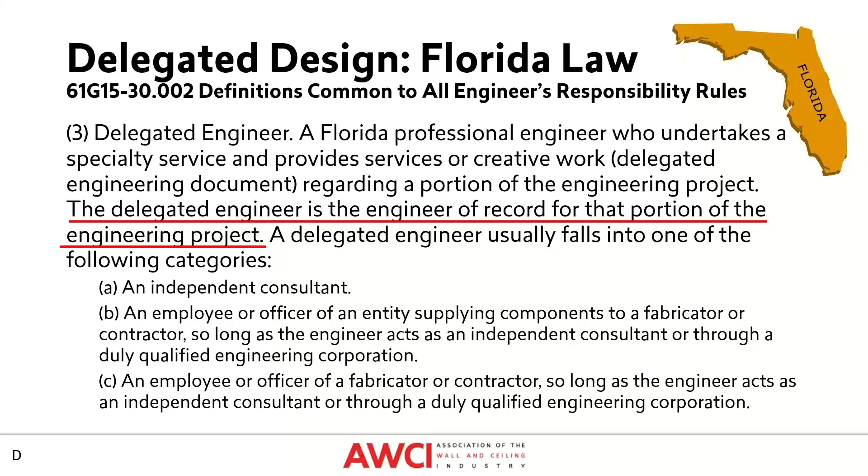They usually fall into one of these categories: independent consultant, sometimes working for a manufacturer or supplier for many years - that's how I cut my teeth, I learned about this working for a supplier of the product - or a fabricator or contractor. Some contractors have their own engineers on staff. I know Andy's company had an engineer working for them who left and went to work for one of the AWCI member contracting firms. So there's a lot of different ways you can have a delegated designer.

There's another group called CASE, the Council of American Structural Engineers. All this is in the CASE documents, but what it means is the architect or the structural engineer of record can delegate the design. So it isn't always the general contractor or subcontractor, but the structural engineer of record still has ultimate responsibility for the overall design of the building. So they can't say, well, I delegated that off, so it's not my responsibility.

You still have to submit the drawings to them. They still review the drawings. They may not know what they're looking for, but if, say, the load is coming into the bottom of the beam and they don't account for the beam twist, that's on them, the structural engineer of record.

And the most important part to us - lines of communication must remain open between all members of the design and construction team. So as a specialty engineer, you must be able to reach out. You may have to go through the general contractor, or at least copy them on your correspondence, but you need to be able to contact the structural engineer of record, or SER.

And when that line of communication is not open, it creates all sorts of problems. I was actually involved with Andy on a project a few months ago where this happened - the structural engineer of record was hard to get a hold of, was not communicative. I think he was a little embarrassed because he'd made some mistakes, but it was very difficult getting that job built, though it eventually led to a successful project.

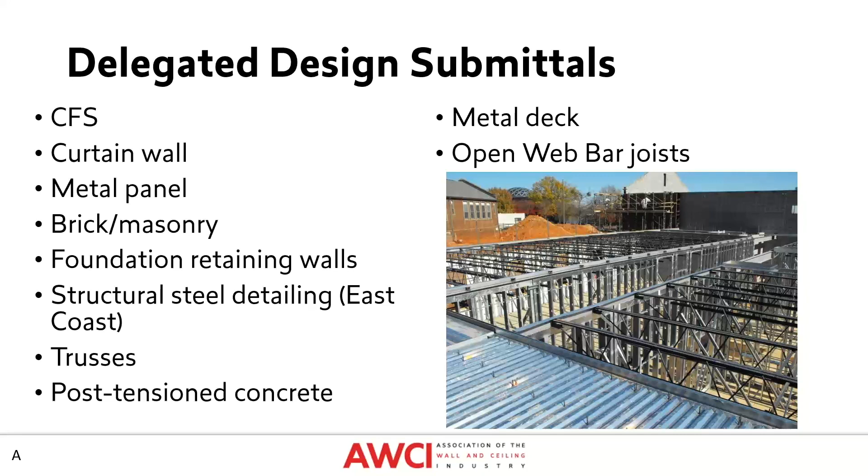Some other items, aluminum occasionally, the window washing equipment, those can impart some heavy loads onto our framing. So if we're going to support the window washing equipment, we need to know it. That information needs to be provided to your engineer so that they can appropriately design it. The same thing goes with canopies. If the canopies are attached to the wall framing, that's information that you're going to need to get from the general contractor and provide to your specialty engineer.

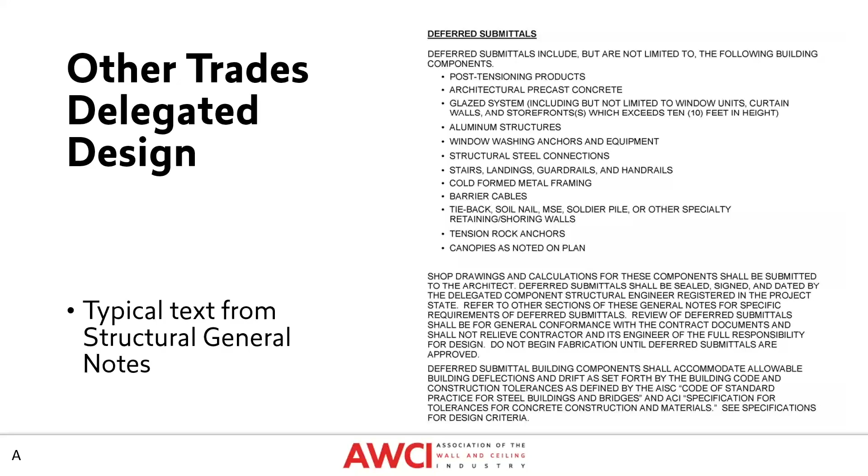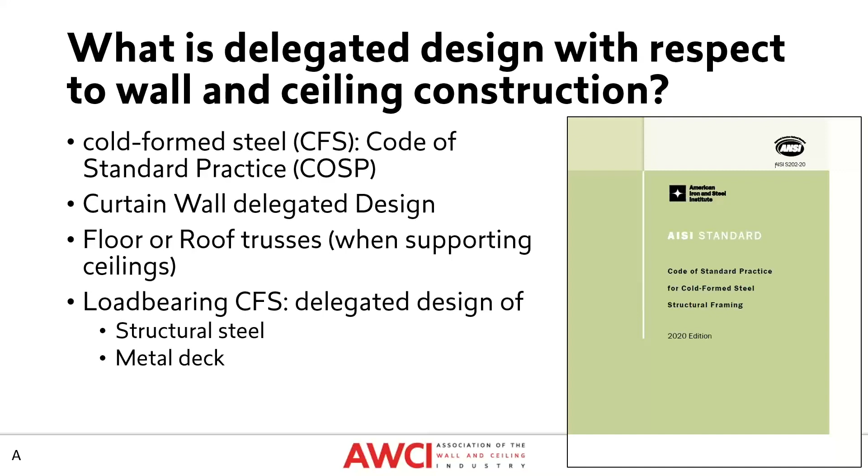Some other things that are delegated: curtain wall design. That's something that's often delegated and we interact with on every single project. Floor and roof trusses, they typically have a similar code of standard practice that we deal with. But if you're dealing with ceilings, you might be attaching to the underside of them, so it's good to be familiar with their work. Structural steel and metal deck, if you're supporting them, and load-bearing framing, then it's important to realize those delegated submittals as well.

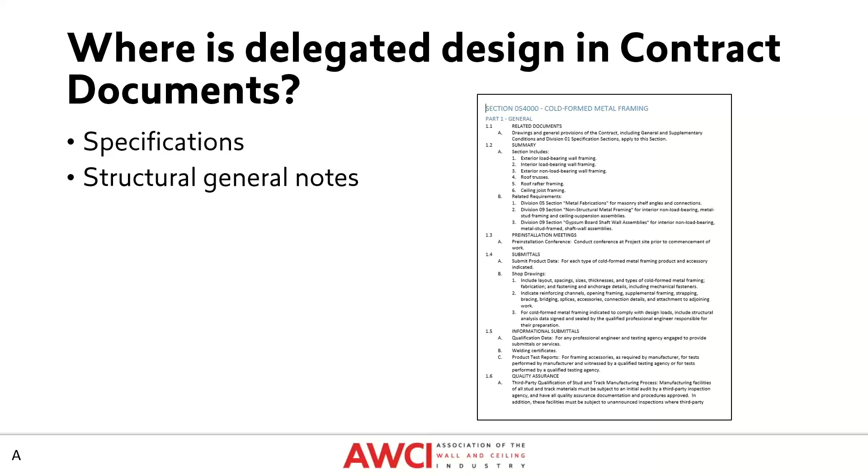So where are you going to find what's delegated? I mentioned the structural general notes. Another good place to look is the specifications, so that might be the 5400 section or the 09-2216 section for interior. Specifically in the 5400 spec, you might see something like this that lays out what's specifically required in the submittals. And then you get to section E, where it specifically indicates that shop drawings are required.

So what is required of the shop drawings, this is something that you're going to provide to your specialty engineer so that they have this information as well. So they know what's required of their design and their submittals that you're then going to submit to the general contractor and the architect and engineer of record.

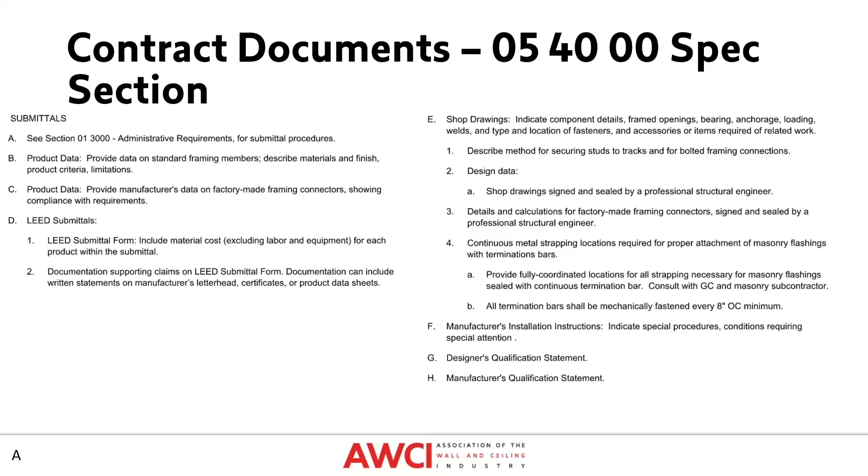I should note that in the handout, the headings on this slide and the next one are backwards, so just make a note of that. There is a big difference when you go from the 5400 to the 09-2216, because you don't see that requirement for shop drawings necessarily. You might have to submit product data. This does include shop drawings, but it's not to the extent that the 5400 structural requires. So it's just something to be aware of. You want to read these specifications to know what actually is required of you and your engineer.

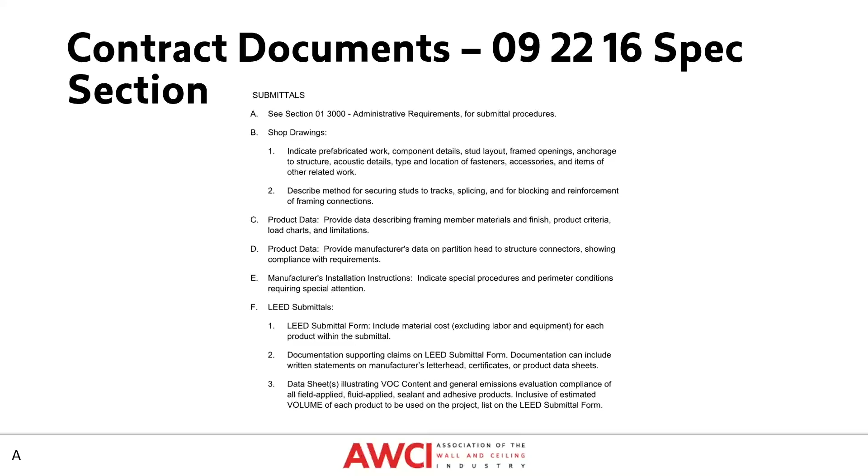So now this brings us to our first poll question. Hopefully you're all seeing the poll question and able to vote. So where in the contract documents might you find the requirements for a delegated design? The 5400 specification, the 09-2216 specification, the structural general notes, or any of the above.

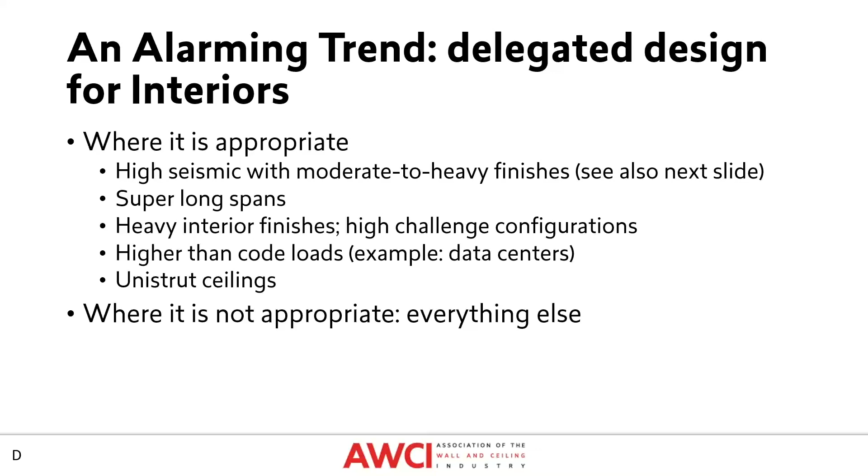But most of this stuff, most of you contractors that do this type of work have been doing it for years, for decades, and you know how to make it work in most applications. When you get a structural engineer involved, all that does is increase cost. You're getting into an area outside their specialty, into requirements that, quite frankly, are not necessary for adequate performance of the building. So I say it's appropriate in these 5 bulleted areas, and not appropriate with everything else.

Interior walls, the interior framing, is considered non-structural framing. Exterior walls, curtain walls, and load-bearing walls that carry the weight of the structure are considered load-bearing or structural framing. AISI has 2 documents: AISI S240, for structural framing, like load-bearing studs or wind-bearing studs on the outside, and AISI S220, for interior non-structural framing.

For interior non-structural framing, there are limits on how much load these non-structural members can carry. It's limited to not more than 10 pounds per square foot, with the caveat that if you're in a pressurized plenum, it can go up to 15, and you can still use non-structural studs. It's also limited to no more than 100 pounds per foot of wall, or no more than 200 pounds per individual stud.

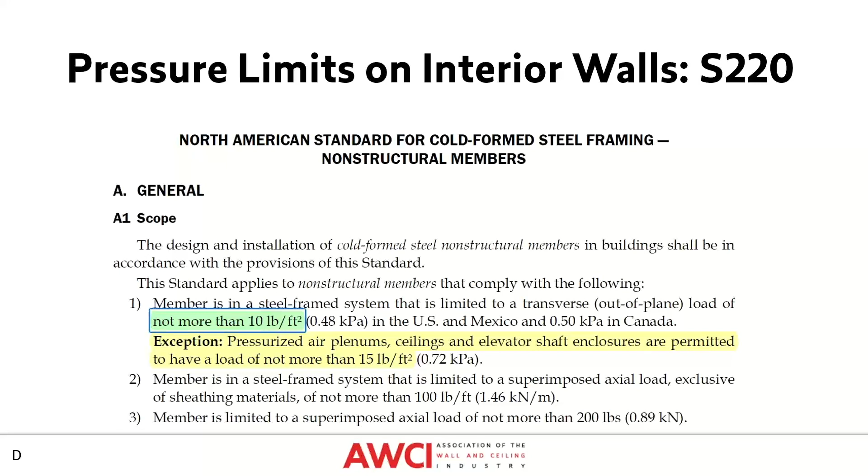So if you want to hang cabinets on the wall with studs behind it, and that cabinet won't impose more than 200 pounds per stud, you can do that with non-structural studs, sometimes without having to hire a specialty structural engineer, depending on the manufacturer's data available. The limit for pressures in the building code is a live load, not a wind load—interior walls need to be designed for 5 pounds per square foot, unless there's something additional specified. Sometimes for high-speed elevators it'll be up to 10 or 15 pounds per square foot.

So this leads us to the next poll question: what conditions are appropriate for delegated design on interior non-structural walls? Option 1, it's never appropriate. Option 2, heavy finishes, long spans, higher than code loads. Option 3, delegated design should always be specified for interior walls. Or lastly, when the walls are supporting cabinets.

We'll leave the poll open for a minute or so, and it looks like we have a question out there: is the role of delegated engineer legally defined in all states, or does it just vary?

I'll answer from what I know, which is that it is defined in some states and not in others. So what you should do is ask the engineer who is registered in that state, and they can tell you whether or not it's defined.

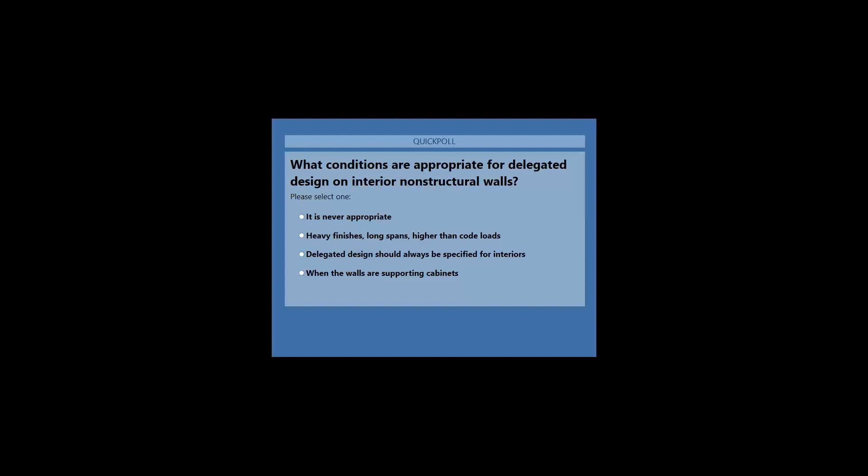Andy, do you have additional information on that? The correct response—you can go back to the Code of Standard Practice, which technically isn't enforceable, but it's defined in there. And that is true, applicable as well.

All right, so I cannot see the poll results. Andrew, if you could read them back to us. We got 86% said heavy finishes, long spans, higher than code loads. So I think 86% are paying attention—good job, or guessed right. All right, great.

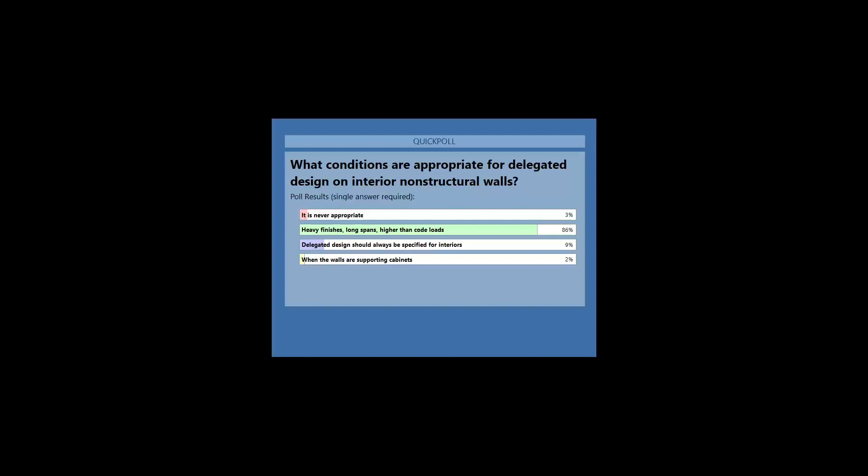Thank you. Just a couple comments back to Andy's slides before.

The horizontal shaft and vertical shaft may require engineering. The horizontal shaft anchorage is often missed during construction. That's referred to in, say, 0922, 1623. And then, so is there a design requirement for shaft walls?

I think that was just a comment to keep an eye out for that. And then another one: do you know the official definition and difference between delegated design versus deferred submittal?

Andy, I'll let you take that one. I don't think I know the specific differences offhand. Don, do you? So a delegated designer is, I think, the way it was defined in Florida.

So the state defers it—the designer is the individual that provides that design. And then it talks about the design responsibilities. A deferred submittal may have definitions in different structural documents, and that's something that comes after the fact. A deferred submittal does not necessarily have to be done by an engineer.

So you can have deferred submittals for items that include a manufacturer's rep providing connection details, or a company that makes brick ties or fasteners providing a design for those fasteners based on a certain amount of wind load. That can be a deferred submittal, but you may not have to have a delegated engineer design those. So the deferred submittal is a broader category, and it may be a sub-submittal that could be an architectural design that may not have been the responsibility or purview of the structural engineer of record.

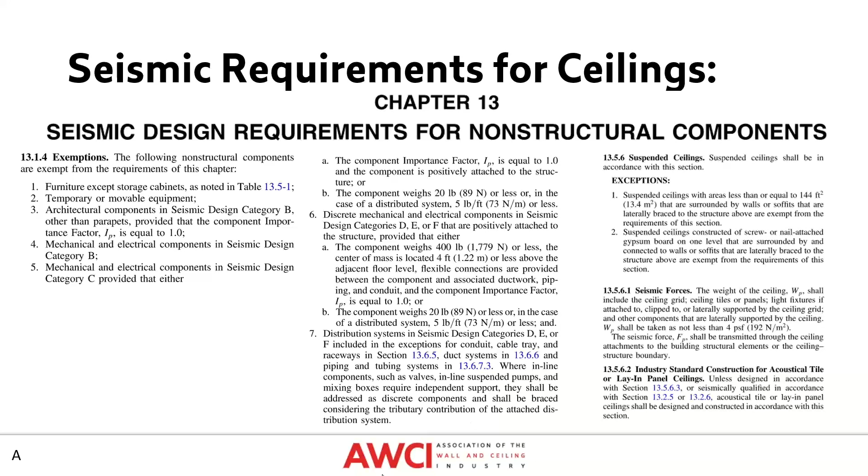So the one thing you want to pay attention to here is specifically the exemptions or exceptions, which ASCE 7 has decided to use both words for. In section 13.1.4, they provide a couple of exemptions, specifically furniture, except for storage cabinets. So as Don had mentioned, when you have those heavier storage cabinets hanging on your walls, that's going to need to be designed for seismic.

If you have architectural components in seismic design category B—also known as SDC on the structural general notes—and your component has an importance factor equal to 1.0, then once you exceed that, you're going to have a seismic analysis done on your non-structural components.

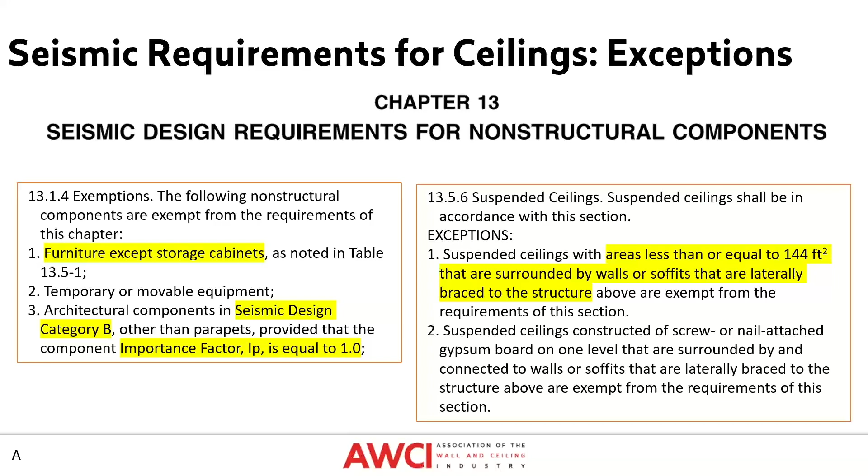For ceilings, if the area is less than or equal to 144 square feet and surrounded by walls or soffits that are laterally braced to the structure—so if it's all tied together and can't move, and it's smaller than 144 square feet—then you don't need to have a seismic analysis done. Otherwise, you do.

And that quickly brings us to poll question number 3: which parameters will allow seismic design to be excluded for non-structural framing per ASCE 7? Furniture, not including your storage cabinets; or architectural components in seismic design category B, SDC B, with an importance factor of 1.

A 144 square foot or less ACT ceiling with braced walls on all sides, or all of the above.

Someone just commented that deferred design is trending because the specialty structural engineer has no contractual relationship with the SER. I think Don's actually going to mention that relationship. Don previously noted that our relationships are typically with the contractor, the subcontractor, or the general contractor, and not directly with the SER.

89% got it right, so yes, it is all of the above. Those can all be excluded for non-structural framing.

There's another question here that says, I've always thought engineering fees should not have to fall on the metal framer, and the metal framer needs to know answers before confirmation. I've been involved a lot of times, talking with people about where that delegated design belongs, and shouldn't the engineer of record be doing his or her job to complete the design.

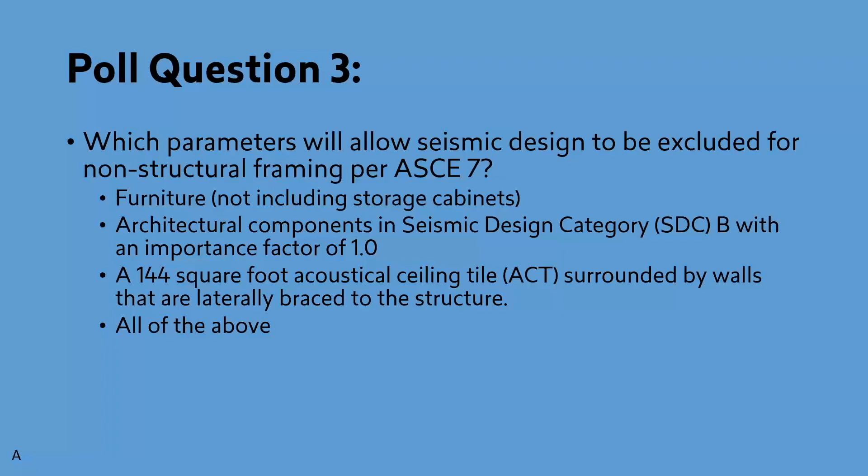Seismic for acoustical ceilings. Now this is not a spring hung gypsum board, but this is another document that covers a lot of the same provisions as ASCE 7: NEHRP recommended seismic provisions for new buildings and other structures, FEMA P2082, Volume 1. A lot of the provisions in this were pulled into and adopted into ASCE 7.

The reason I point this out is this is not a code required document. It's not even referenced by the building code, but a lot of the provisions here are the same as in ASCE 7, and this is a free download. ASCE 7 you have to get from the American Society of Civil Engineers. I don't think it's like the International Building Code where you can view it online. ASCE, because they're an association, has to make money selling their books, so I don't think you can get it free. Correct me if I'm wrong, put something in the notes or chat, but it's over $100, I think, even for ASCE members.

So if you want to get this document, here's the place where you get the free download. What it has in it is a table in section C13.5, summary of requirements for acoustical tile or lay-in panel ceilings, back in the commentary. By the way, for those of you that do have ASCE 7, there's a similar table in the commentary of that document, but it talks about all the different requirements based on size.

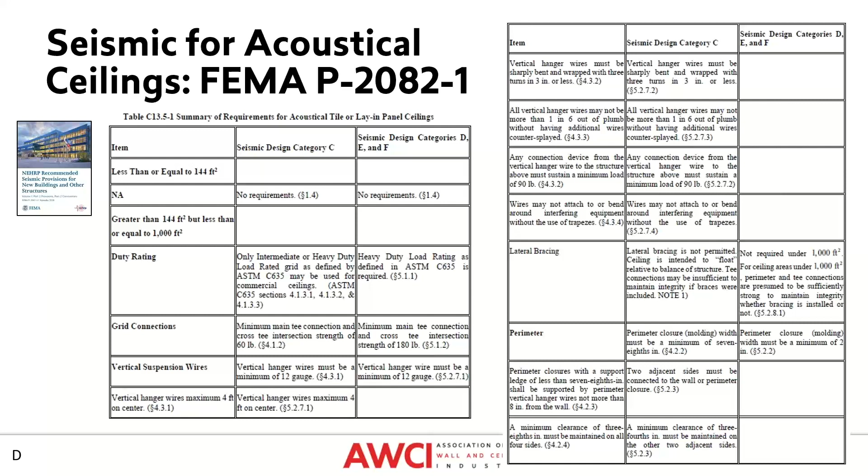We had a couple folks from United States Gypsum come in back in February and give a presentation on seismic requirements in suspended ceiling design. They do a very thorough job of going through the background of the requirements, what the seismic requirements are. They mention things like ASCE 7 as well as the ASTM standard

I mentioned just a moment ago, ASTM standard E580. This contains a lot of the same requirements that are in ASCE 7, and these are often referenced in the architectural specifications. And of course, they are referenced in the building code. This gives a lot of the details for offset from the edge of the walls, how you could put the support wires in, the vertical supports and splay wire supports. So different requirements for different types of ceiling, but ASTM standard E580 gives those requirements.

Again, this is not a free download. I think it's $63 for the latest version of the document, but if it's referenced in your standards and you're doing these kind of ceilings, it would be good to go ahead and get this document.

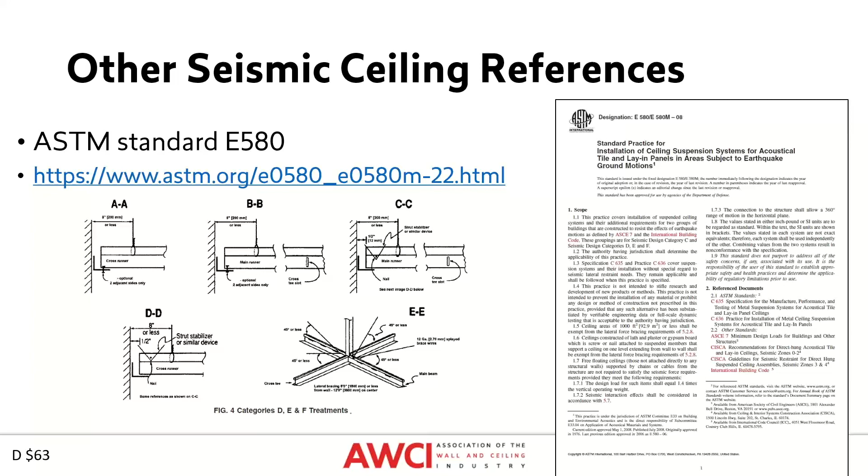So that brings up the question, who is responsible for the design? Andy, back to you.

As mentioned, the code of standard practice is really going to lay out who is responsible for what. So when it all boils down to it, technically the engineer of record is responsible for the overall building. They're responsible for even what they delegate. So when they do delegate, they're also responsible for providing a lot of necessary information.

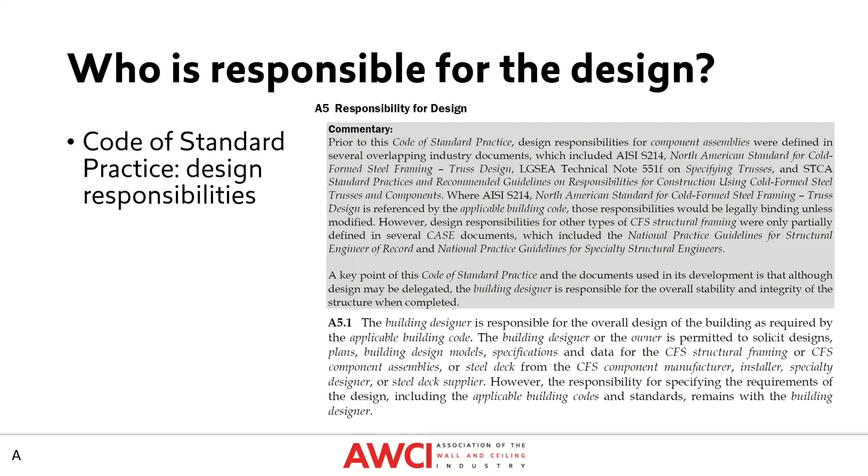So that's the appropriate building code, the appropriate loads that the delegated designers have to conform to. Whether that's gravity loads, lateral wind loads, if you're doing a load-bearing project, the gravity loads that it's supporting, as well as any kind of lateral loads on a lateral system, shear walls, X-brace walls, that all needs to be provided by the engineer of record. Oftentimes they shirk that duty, but according to the code of standard practice, that's information they are required to provide, as well as a complete set of contract documents.

So who's responsible for the design? The owner or contractor shall furnish to the CFS component manufacturer and installer a set of construction documents prepared by the engineer of record and architect of record, including any addenda showing basically what's required of you. And your responsibility is limited to what's on the construction documents.

And as all of you know, per that first sentence, the construction documents are assumed to be correct in all details. And that happens every single time you get a completely perfect set of drawings and nothing's incorrect. Obviously, that's not the case, but you are limited to what's given to you and only responsible for that. So if things change, they need to provide you with those changes so that you can address them, provide change orders as required, and to any changes they make due to things that have changed in the drawings.

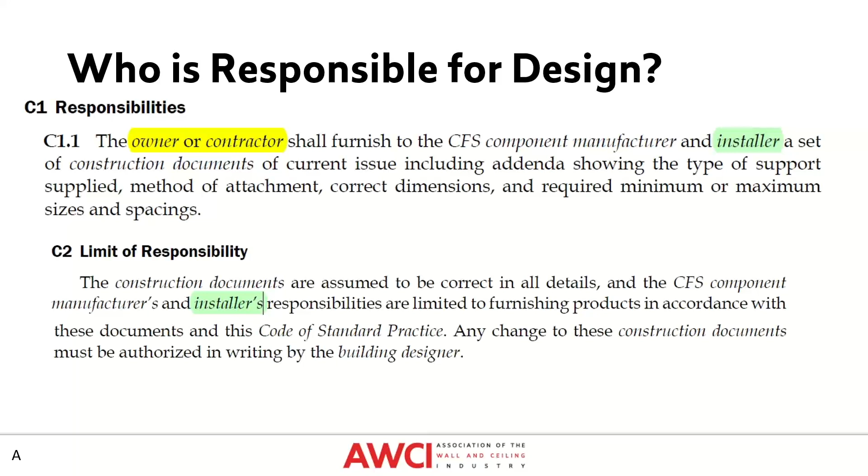So what kind of things do you want to look for? What information do you need? You do need a full set of drawings, so that's architectural and structural drawings. When I'm doing my design, I absolutely need those things, and they need to be the most up-to-date sets.

If you send me a bid set and you're getting ready to build it in two weeks, there's going to be a newer set of drawings out there. We may need a set of mechanical drawings, especially with interior framing, to have an idea where mechanical ductwork and piping is. The structural general notes should have the code reference, and it should match the data the drawings provided.

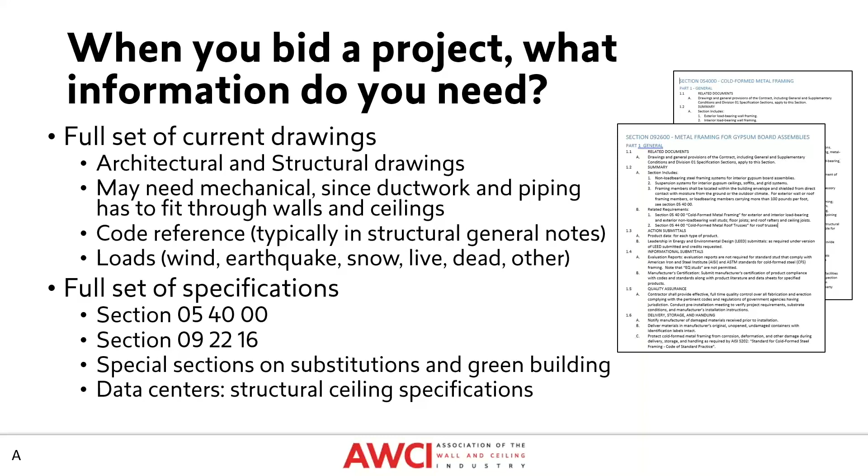Again, they need to provide loads: wind, earthquake, snow, live, dead. There might be some others, like rain or some other things as well. A full set of specifications, so that's the structural and non-structural specifications, as well as maybe some additional specifications if there's substitutions, some green building specifications as well. And for data centers, sometimes they might have a structural ceiling specification, so if you're doing that type of work, that's something you also want to get and provide to your specialty engineer.

Before we continue on, someone asked, in this delegated design or deferred submittal, how is a sub expected to price work without knowing the sizing, gauges, and connections of the project or correct framing components? What do they do?

That's something we're going to cover a little bit later on, but what you do is you make friends with a specialty engineer. You hire them for projects, you don't just use them, but a lot of times if you've been a repeat customer with these guys, or sometimes even if you pay them up front, they can give you preliminary sizing before you get the job. And what you have to do is, if you do get the job, you've got to promise to work with those guys. Andy, I'll let you comment on that as well, because you've got customers that treat you right and some that don't.

Yeah, that's absolutely true. You have your customers that you work with hand in hand that say, hey, can you look at this job before me? I'm bidding it, it's got some crazy tall spans, I don't know what to do. I think some subs have a good idea and have some software that they use that helps them price stuff, but having that relationship with a specialty engineer that can give you some preliminary sizes that you can take to bid can give you an advantage. And it builds a good relationship with an engineer.

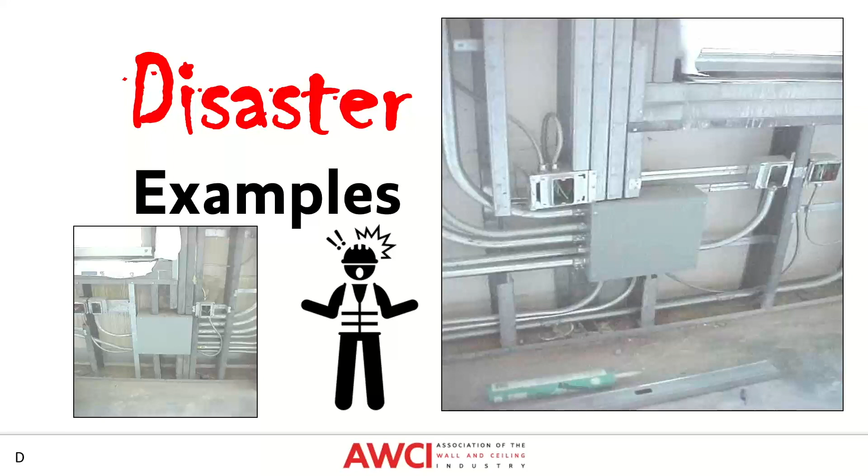So disaster number one, we're going to cover 4 of them. You won, or even worse, you built the job and you find out afterwards that you totally missed the delegated design requirements hidden in the contract documents. So what do you do if you miss the requirements?

Number one, you plead with the general contractor or the architect or the engineer or whoever put that requirement in there and explain your situation. Tell them, hey, look, I've been doing this for years, we've done similar projects, we use heavier, beefier framing, we use better studs, whatever it is, but try to get that coordinated and see if they'll let you off the hook for this thing.

Now, a lot of times they don't get right back to you, they don't tell you immediately yes or no, they leave you hanging. So while that is happening, don't wait for an answer. Get with a specialty structural engineer. Hopefully you got one out there on speed dial someplace, or you've got a good relationship with one. If you don't know a specialty structural engineer, check with the Cold-Formed Steel Engineers Institute, cfsei.org.

They've got a tab in there called Engineer Finder, and you can find somebody, call them up, find out what their price is and their time frame. And what they're going to need from you is three things: architectural drawings, structural drawings, and the section of the specification that is requiring this.

And what they will do is they will help you read through that specification section or read through the documents and see really what does it require, because it doesn't always require a full set of drawings and calculations. Now, I know when Andy does these jobs, when I used to do this kind of work, we would provide a full set of drawings, full set of calculations, put our seals on them, and that would be the entire package.

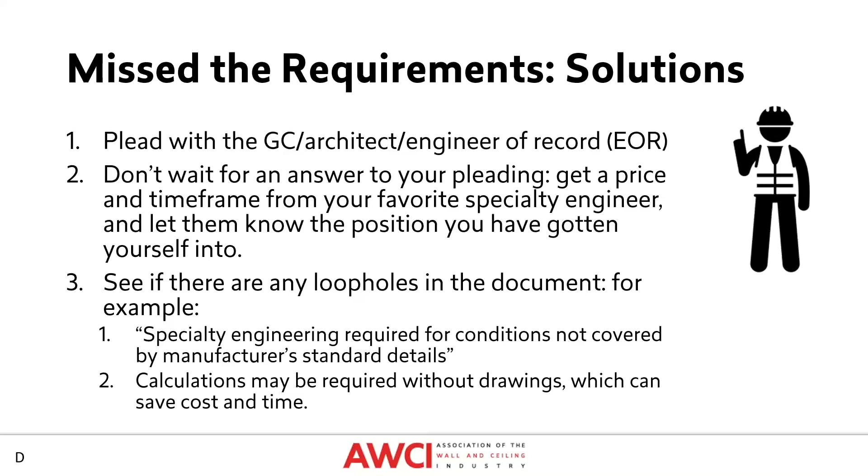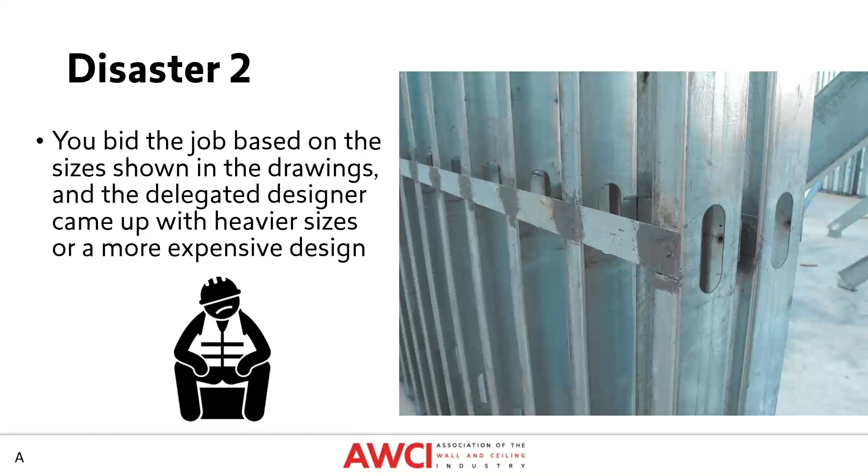So, disaster number 2, Andy, I'll turn it over to you. All right, so you bid the job based on sizes shown on the drawings, and I, or your delegated designer, came up with heavier sizes or a more expensive design.

Go through all the bullet points, it all leads to the last one. Basically, a lot of times the engineer of record provided a design that's not feasible, whether that's difficult connections or just connections that aren't feasible. They didn't necessarily consider deflection. We've seen engineer of records put shear walls at slip connections, which makes crazy, ridiculous detailing required to make that work.

A lot of times the engineer of record didn't read the footnotes, so this might come into play with them looking at a table out of the SFIA tabulated data, like the footnotes to the right there. So basically it would assume that your wall is fully braced, which would be less 4 foot on center or tighter. Their design might require web stiffeners, which is not something that's standard. You're not going to necessarily install web stiffeners at the top and bottom of your studs, because that's a lot of labor and a lot of extra material. So that's why we might come up with a heavier stud than what the engineer of record specified.

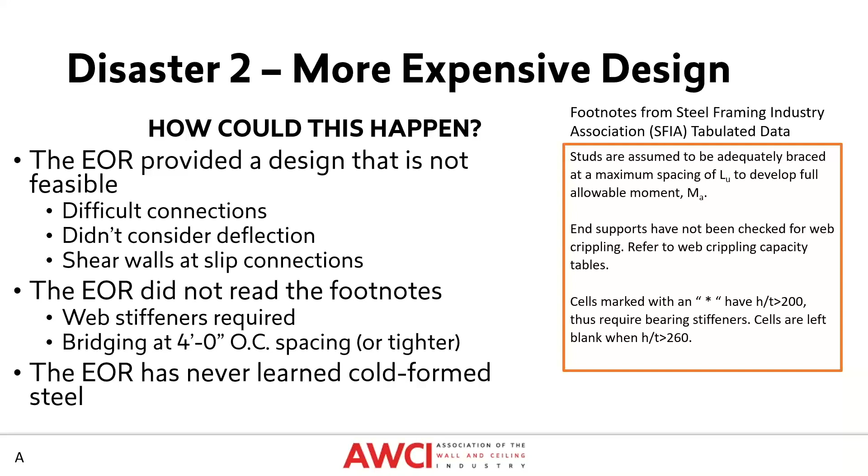So basically, like I said, a lot of times it boils down to the engineers never learned cold form steel. They're opening up a catalog, they have a basic idea what they're doing, but it's basically why you hire a specialty structural engineer, because they, and we, are the experts and can help you through some of the things the engineer of record might not know.

So disaster number 3 is the other side of the coin, where you hired a good specialty engineer to do your delegated design, and we came up with lighter sizes than what are on the drawings. But either the engineer of record is insisting you build it the way it was originally shown, or the GC is asking for a credit for the lighter sizes.

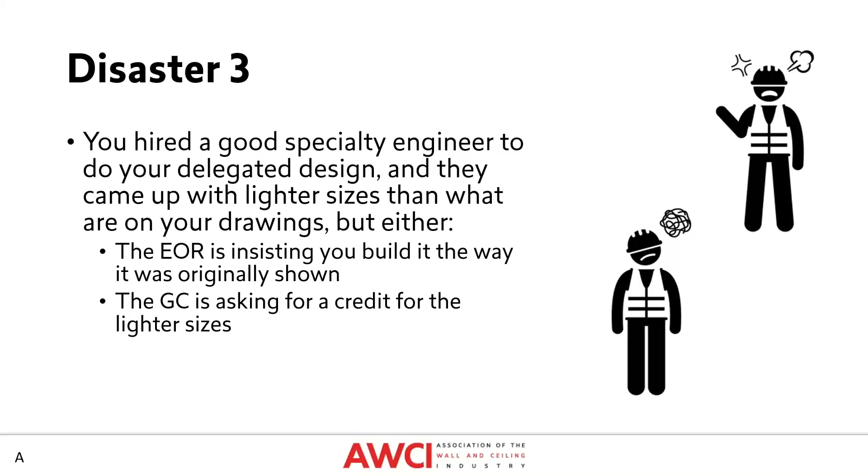So sometimes we'll see the reasons aren't necessarily clear, but we'll come up with something more efficient and less expensive. We recommend working with your engineer to make your case. We're already submitting calculations, so the engineer of record has them to see where we came up with our design and why it's the appropriate design.

This actually ties into one of the questions we just got about anchors. We've seen a requirement for screw anchors or something other than PAFs for connections, and it's not really clear what the reasoning behind that is, when there are more efficient ways to do your top and bottom connections. We've also seen in specifications a requirement for PAFs to have a 10 times safety factor on them. That can actually be detrimental to the structure.

If I'm designing the connections for 2 or 3 times more than what they need to be, you're going to have 2 or 3 times as many PAFs. To get that in a small area, you're going to start busting out concrete, especially in post-tension concrete, to the point that you don't have a viable structure. So hiring a good specialty engineer, we can make this case for you.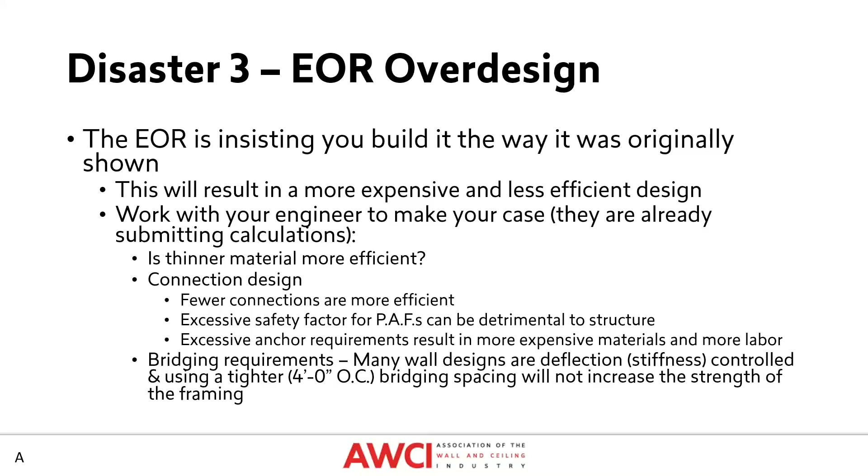Another place is the bridging requirement, where regardless, they say no bridging has to be 4 foot on center, when in a lot of cases, for curtain wall framing, that isn't the governing factor for the design. So you can go to 5 or 6 foot with your bracing. When they're asking for credit for the lighter sizes, you really shouldn't be punished for your engineer's efficiency.

If the sizes were on the drawings, every subcontractor was bidding based on those sizes, so you shouldn't be punished for the fact that what was on the contract drawings wasn't correct. This kind of goes back to that good relationship - if you have a good relationship, your engineer may be willing to assist you in your arguments and help provide proofs for why you should be able to use those lighter sizes.

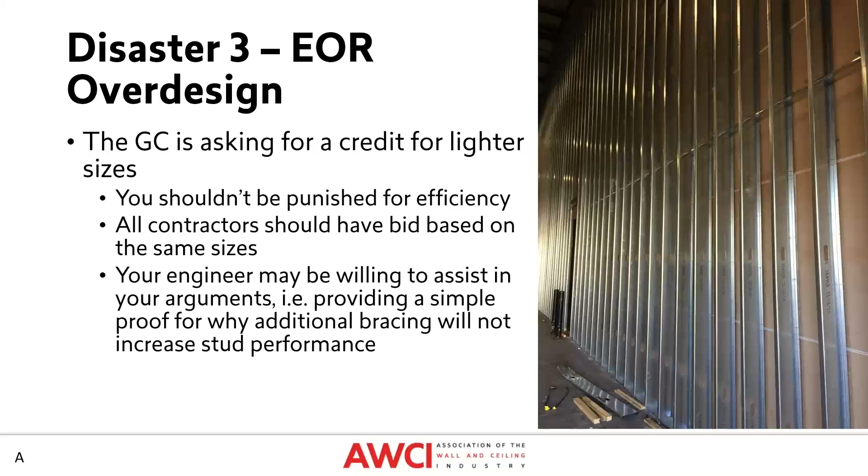All right, that brings us to our last disaster, disaster number 4: coordination with other delegated designs. As many of you know, when the project starts, a lot of times you haven't even been contracted on the job, and the same goes for some of the detailers, curtain wall designers, and sometimes delegated design drawings for the exterior cladding. So as the folks designing or installing the steel that's going to hold up that exterior cladding, you've got to wait for those specialty delegated design drawings to come in. The curtain wall guys have to wait for theirs, the truss guys have to wait for theirs. A lot of times there's coordination that isn't ready yet when it's time for you to do your design. So you're waiting for these drawings, and when they do come in, all of a sudden they don't match.

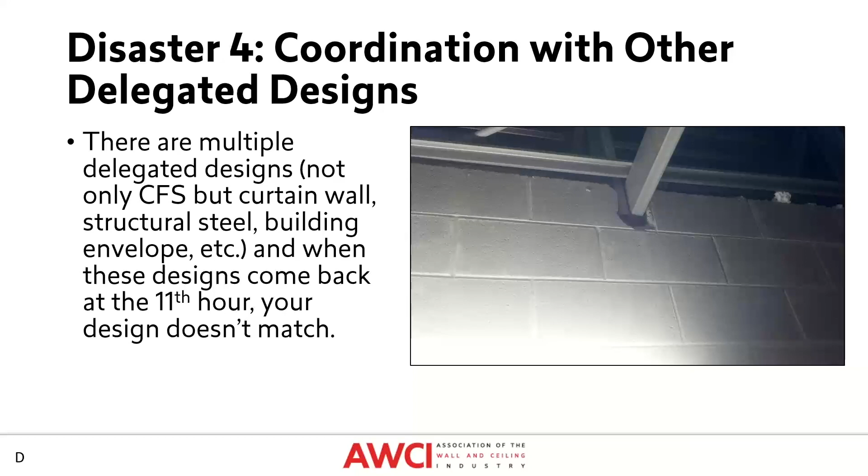Here's one example on the screen: the trusses went in and they're down below the level of this concrete block wall that went up. So when they went to put their pre-manufactured trusses in, they just notched out the block to get that truss in place.

Here's another example. If you're designing a ribbon window and there's a door in it that goes all the way down to the ground, it looks like there's a nice sturdy jamb stud on either side of that door opening, but what if that jamb stud hasn't been designed to carry the little knee wall down below? This doesn't look that bad, the knee wall isn't that tall, but there are super tall windows where sometimes the knee wall comes up 4 or 5 feet, and there's got to be a moment design down there at the base.

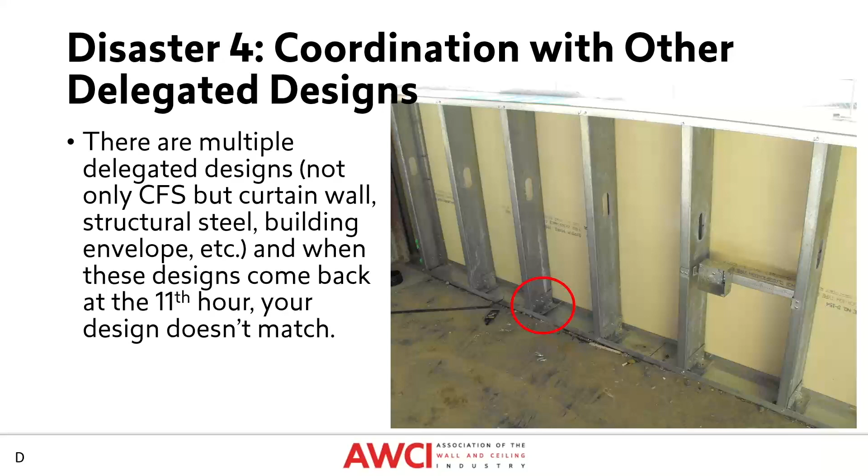And this is what has happened here: there's a ribbon window, a spandrel window, and that moment connection that had to be put at the very bottom. So if you haven't accounted for this in your bid, these are not cheap connectors. The hard part is the labor, drilling those big fat anchors down into the concrete to hold this in, and then putting all those screws into the stud. So if you haven't accounted for it in your design, and you've got a long spandrel window that needs a bunch of these, like this building right here, how do you account for that? Because it can be difficult.

In a curtain wall window situation like this, this is a project I did many years ago in North Carolina. We had these spandrel beams at the perimeter, and we had to bolt it to the side of the slab at the second floor and the side of the roof slab, and then put kickers up in there. But when there's deflection at the roof or at the second floor, where is that deflection going to go? It's got to be taken out at the window head, and a lot of these window manufacturers don't have deflection details for the top of their windows. So this is a deflection detail that Andy's company came up with, but they've got this special caveat note in red, clouded, all capitals: architect and engineer verify, general contractor coordinate, to make sure that this slip connection will work and can be installed properly over the top of the window to allow this movement.

Any slip connections, as many of you know, are becoming more and more important to make sure that the rain screen, the water resistant barrier, and all those barrier systems maintain all the way through, so there's accountability for movement. Whenever there's a detail for movement, that has to be carried all the way through the wall. A lot of times the architects don't carry that through as far as their design and how the exterior works.

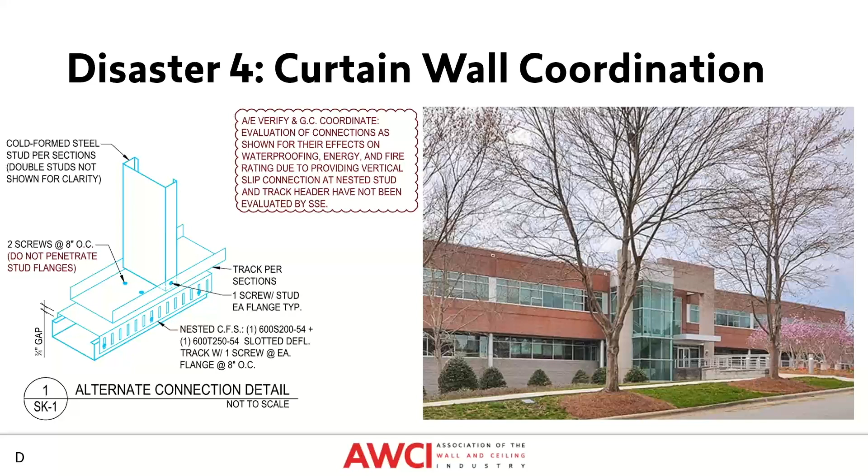So those are the disasters we're going to talk about. Let's also talk about avoiding the pain, and we're going to give you 6 steps. The first one we've already mentioned: partner with your specialty engineer early. Get to know them, work with them, have them on your speed dial. Then they can give you designs up front, and you're not surprised by some of this stuff.

Send them your architectural and structural specifications, let them read through it. As they provide their bid, they may give you information. They may say, hey, even though we usually design brick veneer for L over 600, there's a requirement in your spec that says L over 720, and therefore this stud that they called out isn't going to work, and you're going to have to go heavier.

I know this is an issue because you're trying to bid apples to apples, but if you don't bid it right and you do get the job, then you've got to pay for it one way or another. You've got to do that right design.

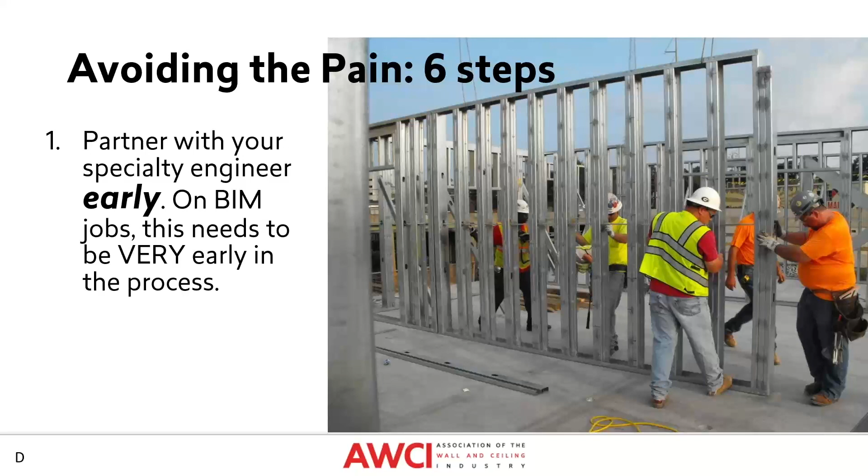So get with the guys early and make them your friend. Become a good customer for your delegated designer. If you have a good one that you like working with, there's a lot of benefits to that, including the potential for free upfront service and help in the bidding process. Your engineer can provide you a proposal up front, potentially give you some sizes for various situations that you might not have a good feel for.

Also reviewing the specifications, the structural drawings, they might have some weird things in either of those items, like bridging at 4 foot on center, or minimum thicknesses like 54 mils. Sometimes we've seen 68 and 97 mils and told our client, hey, you want to qualify this in your bid because 97 mils is ridiculous. You're not going to need that for a 3 foot tall stud.

We've also seen additional design requirements, or the big bad word that most of you don't like to hear: welding. You might start looking at structural details and see that they're requiring you to weld things, and obviously that's not the best way to perform cold form steel framing. So we'll help you find those things. A good relationship often results in better assistance mitigating a lot of disasters. So those relationships are important.

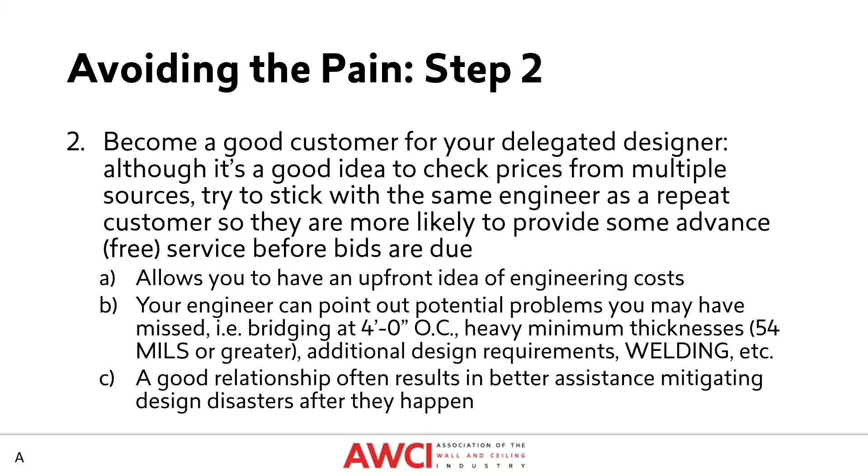That's right. All right, step 3 of 6. Read contract documents carefully, especially the specifications and the general notes, and have your delegated designer read them too. Sometimes the requirements are hidden in an entirely different specification section than the 05 40 00 or 09 22 16.

They may be in the gypsum requirements. They may be in the tile requirements. They may be in the mechanical requirements. I did a project in South Alabama where we designed a roof truss, and I didn't leave an opening for a 5 foot by 5 foot duct. Now the ductwork was shown on the mechanical drawings as a single line, and I missed it.

It was my fault. But what the mechanical guys did, they just took a web right out of that truss. We had to reinforce it. But the question is now, whose fault was that, right? I mean, it was my fault, it was our contractor's responsibility. We were able to work with them and get it worked out.

But this is why you want as many eyes as possible on those documents, on the general notes, on the architectural and structural drawings. Make sure you're working from the right set of documents, as Andy showed you how you can go in and check what building code that is. This is something that the specialty engineers do every day. It's different in different states, different in different jurisdictions.

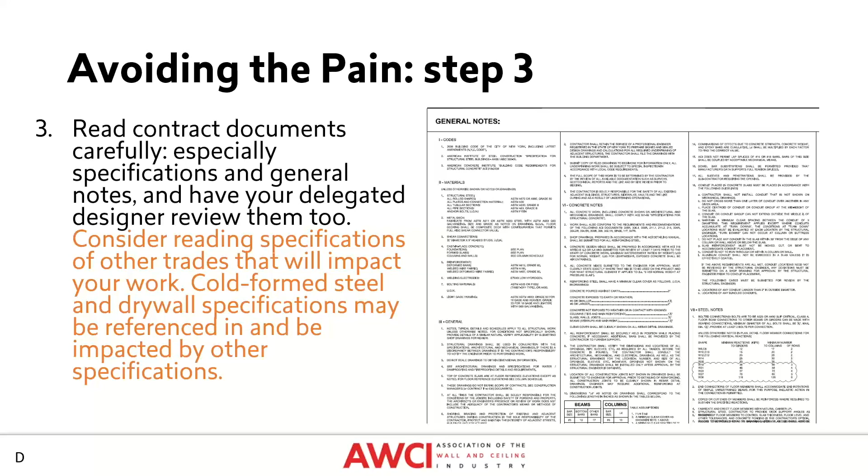We had one question come in asking about what determines whether or not we've got to make submittals to the city. That's up to the city. Most jurisdictions don't need to see the specialty submittals, but there are some jurisdictions, especially out on the West Coast, that want to see all this stuff. So again, it will depend on the city. If you're working with an engineer of record or specialty engineer who has worked in that jurisdiction before, they'll be able to give you a better idea of what's going to be required for submittals.

Avoiding the pain, step 4: make sure the date version of the building code in the drawings matches what is in force where your structure is being built. This will be in your structural general notes, so you can look in there and it'll have the building code. Typically it is based on when the structural drawings are issued.

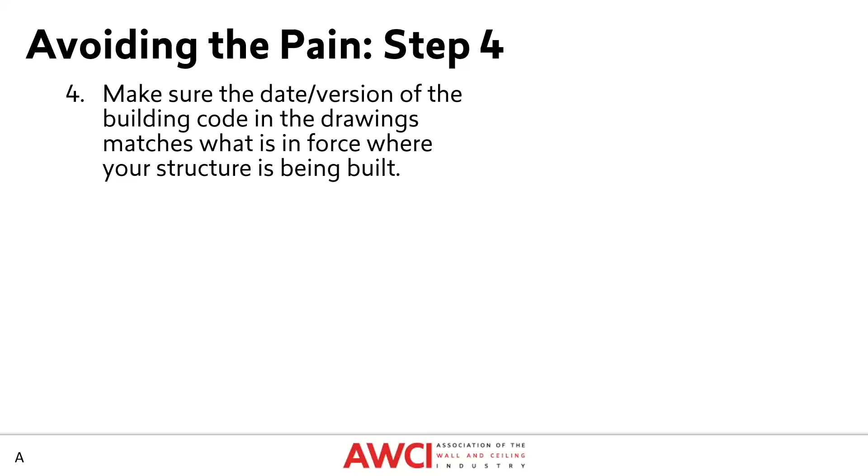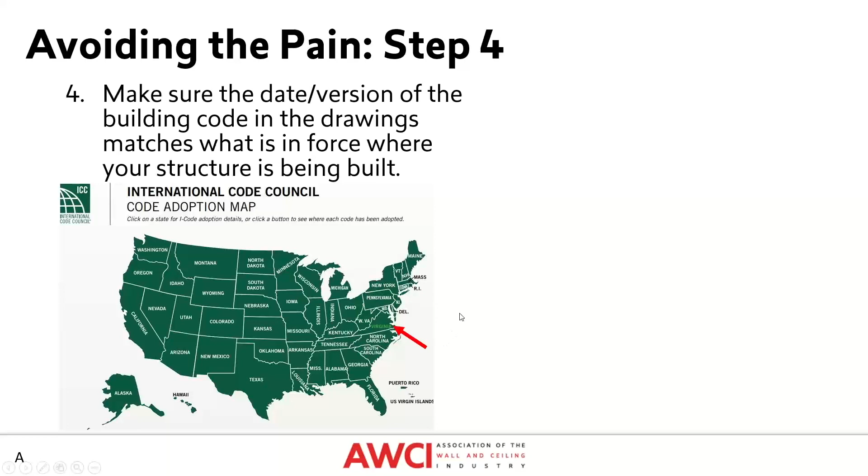A way to check what the correct code is: if you go to ICC, they have a code adoption map. So say we want to click Virginia, it'll take you to what the applicable code in Virginia is, what has been adopted as of that date. Currently Virginia's adopted the 2018 IBC, so that's what any newer projects in Virginia should come out with. For the most part that's about where the states are at, but some states are way far off in the past and some are a little more updated. This is an easy check, and this is what should be listed in the structural general notes.

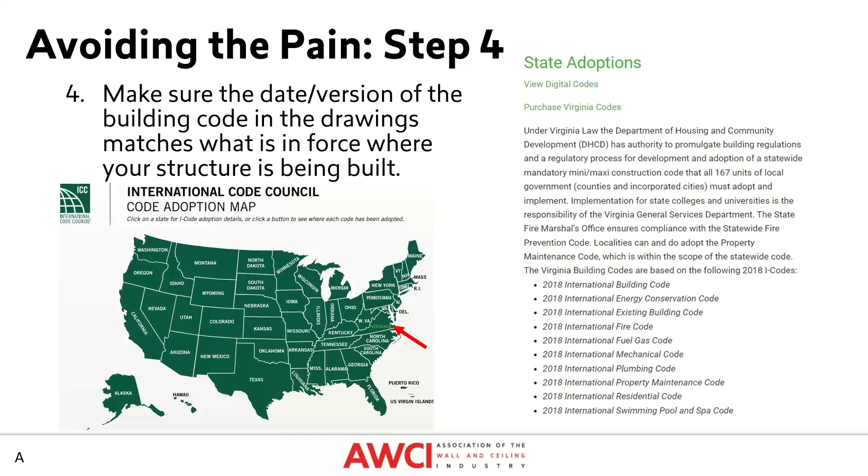All right, avoiding the pain, step 5: be nice. And when I say be nice, I don't mean being weak, but you've all been in heated discussions on projects with the general contractor, with other contractors. People are pointing fingers, thinking about how much it's going to cost them. But please try not to get emotional about these things. Think about the kind of person you like dealing with. Think about everybody usually trying to get to the same resolution: getting the project built. And it's so much easier to deal with people when they're nice than when they're adversarial.

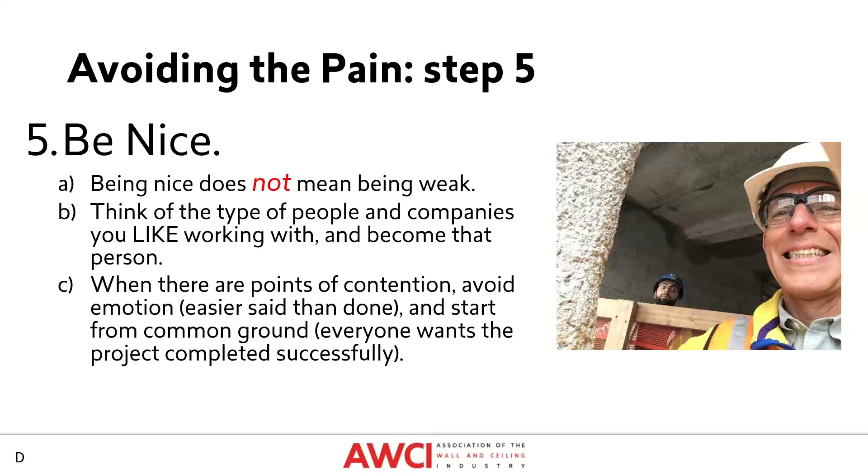Some people use that as a negotiating tactic, but remember, sometimes it's going to cost you money, sometimes you're at fault. You partner with your specialty engineer, partner with others on the construction team to make it so everybody is going to work out. Don't just try to force blame and costs on other people. Try to work together, be nice, and work things out a better way. And document everything.

Job site photos are always important. Take pictures of the problems, send them to your specialty engineer, and those job site photos are documentation of the problems. A picture's worth 1,000 words - to you, to your specialty structural engineer, and to the GC who you're trying to explain the problem to as well.

And really, there's no excuse for not taking job site photos. You've got cameras on your phone, cameras on your iPad. Everybody's got cameras out there, and you should be taking pictures as often as you can to document this material. And I'm not talking just to the engineers - I'm talking to the contractor at the end of each day, the beginning of each day, the beginning of each shift. The reason is, if you document everything appropriately, it's less likely that people are going to argue with you about what's being done.

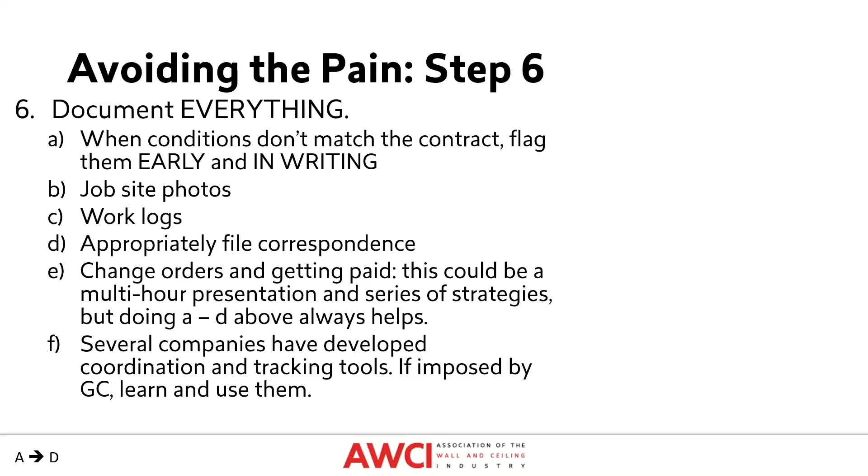A lot of times general contractors will have systems built so you can easily document this stuff. Now, if they don't, if you're taking job site photos, one thing I do when I get out on a job site is take a picture of where I am. For example, when I get off the elevator or stairwell and I'm on the 11th floor, I take a picture of that sign that says I'm on the 11th floor, so it makes it easier to follow through my photographs and see where I was in the building. Because on a multi-story high-rise, multifamily residential, every floor looks almost exactly the same, and it's easy to forget where a picture was taken months or years down the road if litigation or disputes come up. So make sure you do that with job site photos.

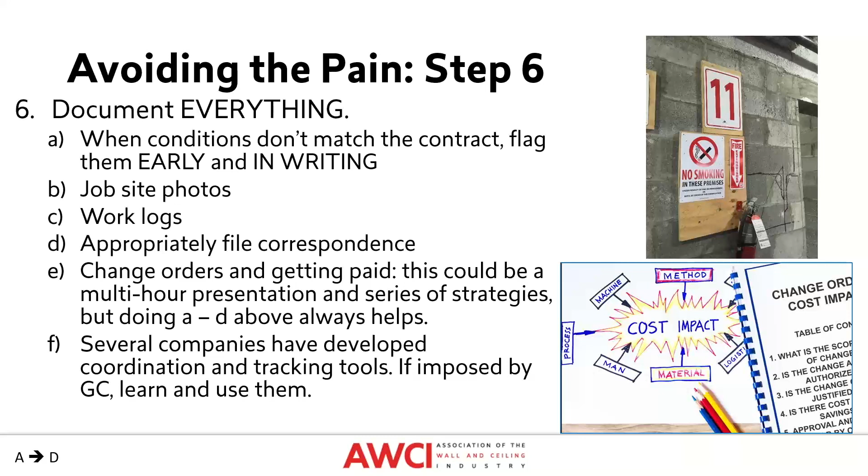I mentioned change orders and getting paid - oh my gosh, there's an entire different webinar on that, I think we presented at AWCI years ago. But all of these things have cost impact, and there are books and legal documents out there on how to get paid for change orders. The better you document it, the more likely it is that you are going to be paid. A former president of AWCI once told me that his father told him this early on in business: if you act like your project is getting ready to go to the courthouse, and you document everything like you were going to have to go to court with this thing, then the likelihood is going to be very small that that's going to happen. So document, document, document - it's so important throughout the process. You think you won't need it, but you've got it just in case you do. So to follow up, I'm going to give you a list of resources.

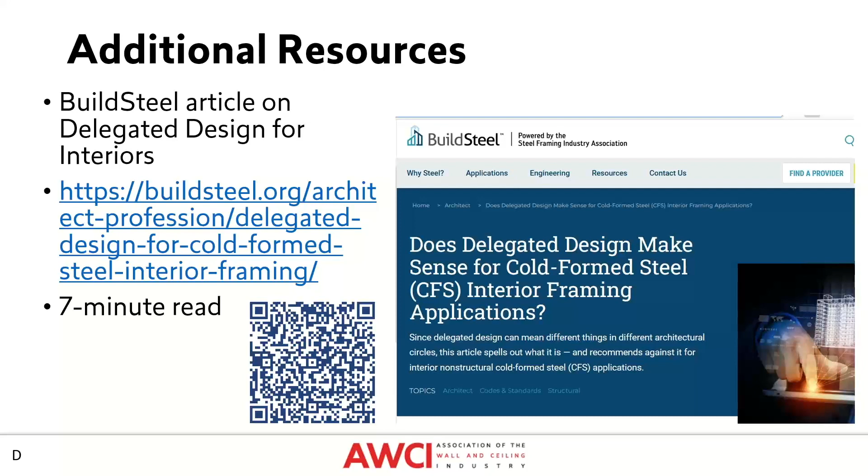Another additional resource is BuildSteel at buildsteel.org. There's a short article on whether delegated design makes sense for cold-formed steel interior framing applications, and they echo some of the things we talked about before, that most of the time it doesn't, but there are some conditions where it does. And then the Council of American Structural Engineers, we showed this guideline for specialty structural engineers earlier, but they also have an agreement for client and specialty structural engineer. It's very similar to the AIA document, but this would more likely be the one the engineer would use if they're contracting with a contractor or subcontractor.

And then with your handouts, you can see there's a little button on the side that says handouts. There are four of them. One of them is the slides that go with this presentation, and the other three handouts are these three tech notes from the Cold-Formed Steel Engineers Institute. Andy, you want to say anything about these tech notes?

Yeah, I think they're good resources. CFSEI has a lot of resources that if you're a member, you can download for free, on a number of different topics. A lot of them are more geared towards engineers, but these couple give some good information. Coordinating CFS with metal buildings, we talked about that. The differences between structural and non-structural, there's some good information in there, what needs engineering, what doesn't. And then temporary construction bracing of walls—load bearing obviously has to be done, and that temporary bracing is very important. So just some good information, and like Don said, this is included with the packet.

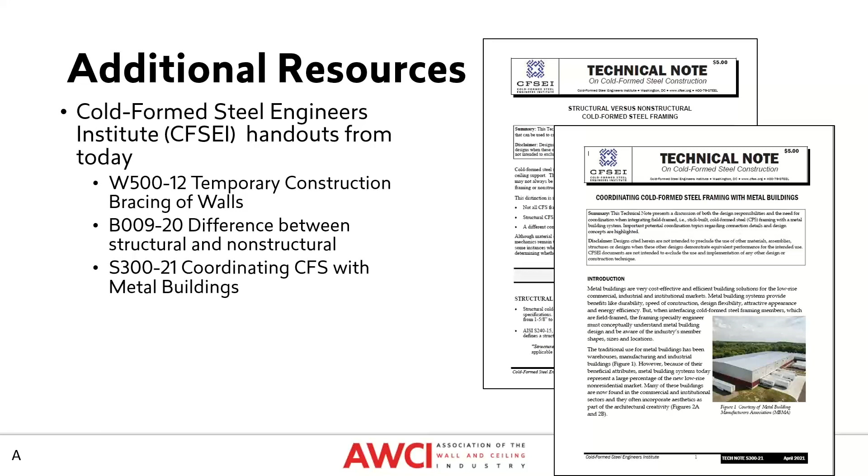One more question here: what happens when the contract documents have no submittal requirements and afterward the architect says they want shop drawings? That's exactly like when the contract documents don't have requirements for a wall built here, but they come back and say, oh, I want you to build a wall. You give them a price. So they say, we want shop drawings. Well, you go to your specialty engineer and they'll tell you how much it'll cost, and then you give them the price. And if they pay it, then that's great—you get your engineer to do it.